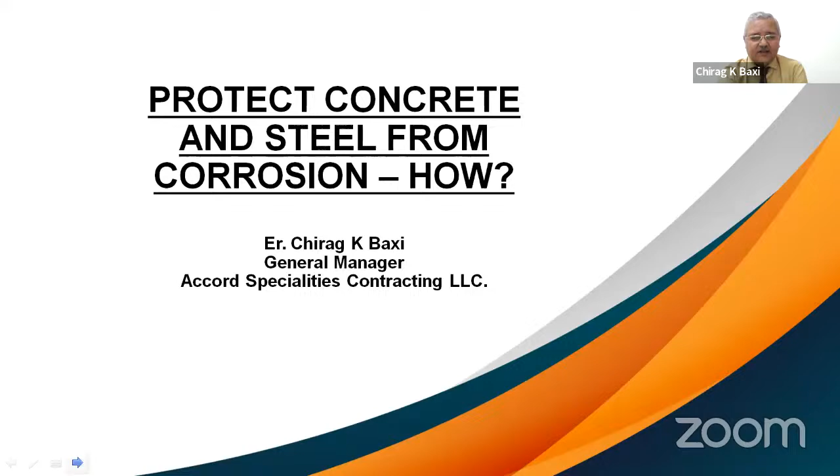Concrete has been helping the construction industry for more than two centuries, and we have reached a stage where we are making concrete sustainable. We want concrete to be sustainable, and for that, we want measures to make it sustainable. How do we do that? According to me, there are fundamental essentials which make concrete sustainable, as we'll see in the next slide.

Concrete is alkaline. When I lecture in university classrooms, I always ask students what the pH of concrete is, but that's not the right question for this platform. The alkalinity of concrete must be maintained right up to its full curing period, or even more—for the whole functional life of the concrete member. Alkalinity is the basic nature, the basic phenomenon of concrete, and that must be maintained. If it is disturbed, we are heading towards its end.

Second, all efforts should be deployed to bring the porosity to zero, or near zero. We all know it is impossible to manufacture impervious concrete. That's fine.

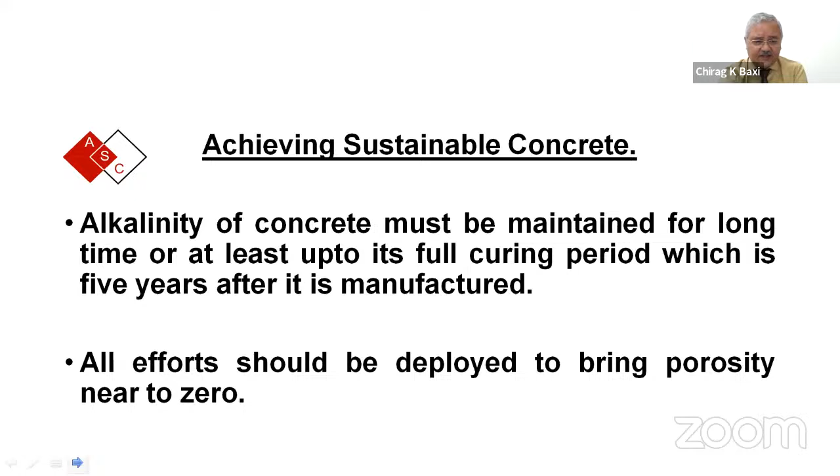But if porosity is brought close to zero, there are very few possibilities of contaminants entering the concrete mass and spoiling the concrete. So this is the second essential thing which should be done to make concrete sustainable.

Third is resistance to chloride. Chloride and sulfates are the strongest enemies, the contaminants that cause concrete to corrode. Resistance to chloride must be ensured right at the wet stage as well as the hardened stage. We should not leave any chloride-containing element even at the wet stage, so that it continues into the hardened stage and develops damage there.

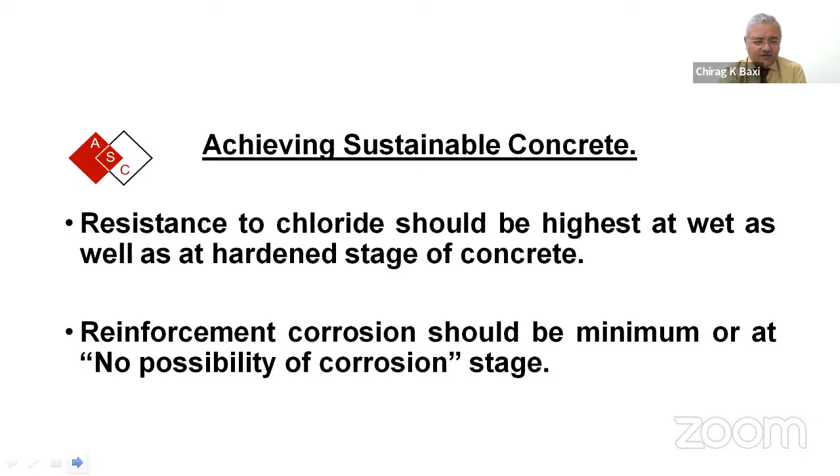Concrete has got some limitations. Concrete is ultimately a man-made material, and it has limitations - alkalinity and so many other things - and we design for that. But concrete has limitations, and we must be able to identify those limitations and ensure concrete is not exposed to those challenging conditions, so that it doesn't start deteriorating and getting corroded.

Factors which affect sustainability are being discussed now. Concrete corrosion - what is concrete corrosion? We are much aware of steel corrosion, rust products, orange products, Fe2O3, Fe3O4, FeO, and all those things. But what is concrete corrosion?

Concrete corrosion, as per my definition and applied knowledge, is a phenomena under which the ingredients of concrete are depolarized, leading to heterogeneity. There are quite many factors which depolarize concrete. The homogeneity of concrete goes away. That can happen only when cementitious binding actions start getting away. So that is concrete corrosion, according to me. By grace of God, it has been agreed upon by so many platforms and areas - this is what I would like to define as concrete corrosion.

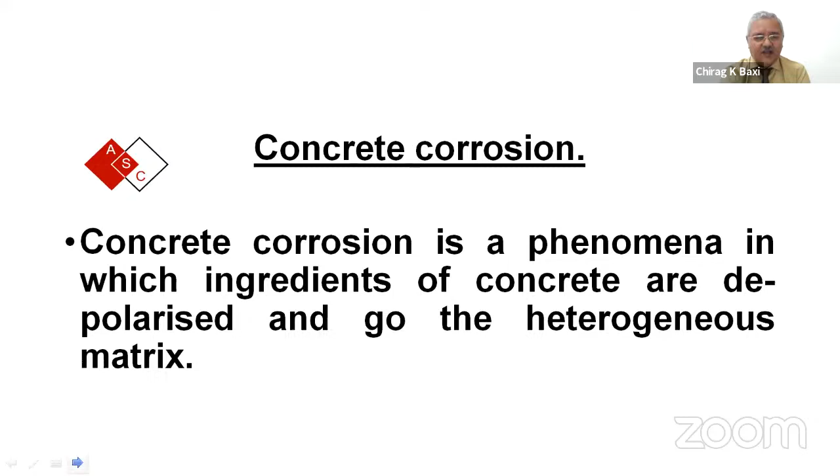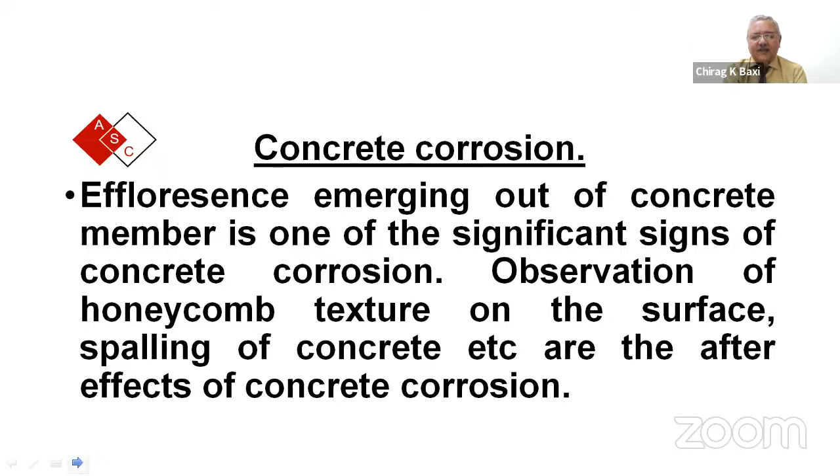Efflorescence emerging out of a concrete member is one of the significant signs of concrete corrosion. Observations like honeycomb texture and spalling of concrete are the effects of concrete corrosion. So concrete corrosion can be seen when we see efflorescence coming out, some honeycomb signs, and spalling. Spalling is a later stage, but when we see these types of things, we have to be alert and on our toes to see that it doesn't propagate further.

Conditions which cause concrete corrosion are now being discussed. High humidity - when concrete is exposed to very high humidity, it cannot function well, it cannot breathe well, it cannot have equilibrium between inner and external humidity, and then concrete starts corroding. High temperature also is a factor which corrodes concrete. We will see the effect of high temperature in one of the slides later in the presentation - what high temperature can do to the concrete structure and matrix is also one of the important factors.

Saline conditions - as we all know, in UAE and in GCC by and large we have saline conditions. So salinity, salty conditions, cause corrosion. They start penetrating inside the concrete core. They have hygroscopicity as a nature, and that helps them enter the concrete mass. That starts reinforcement corrosion - if by any chance we have left any contaminant close to the reinforcement steel, it will start corroding. That also will be the beginning of concrete corrosion.

Since we are all structural engineers. Sometimes design inadequacy - I have seen in this part of the world that design inadequacy emerges from some deficiency, some sign, some effect, some crack from a corner, which ultimately, when analyzed, traces down to design deficiency. It may not be failure, but it is concrete corrosion - the beginning of concrete corrosion. Design deficiency also can lead to that.

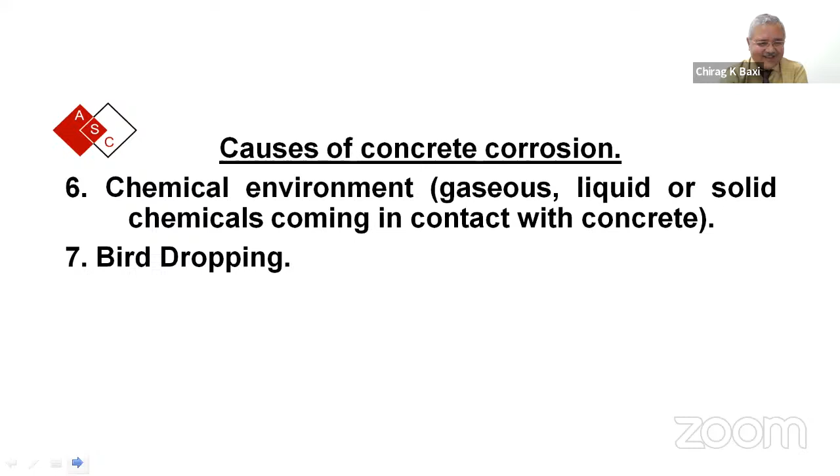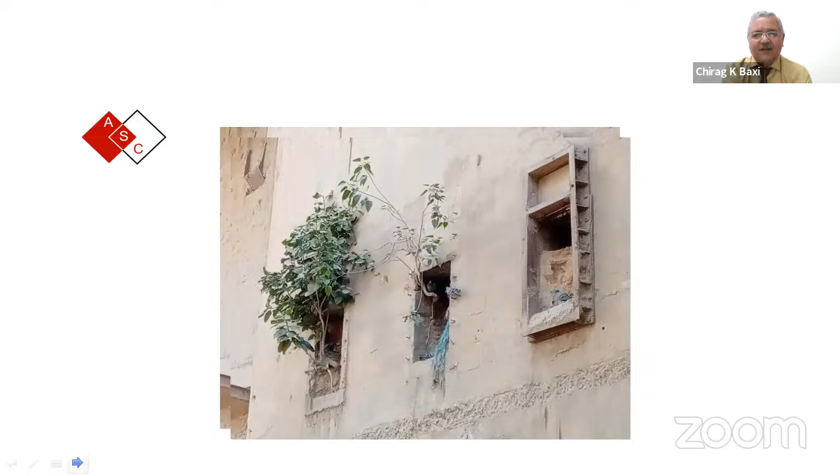The undigested stuff in bird droppings leads to plants growing, like in a terrace garden or window jambs. This plant has come up only because of bird droppings, and these plants have deep roots. When deep-rooted things start penetrating inside the concrete core, they start eating away the concrete matrix, and that's how cracks develop. That again is the beginning of the end.

Substandard construction practices - I don't want to talk much about that. There are many practices which have to be maintained as per standards laid down all over the world. But sometimes substandard practices come out during NDT analysis. When we analyze the structure and correlate the NDT results, sometimes it comes out that there was no reason for a concrete member to fail or get corroded, but substandard practices emerge at that level. I have seen that in my analysis.

There are forced compromises because of financial controls. My budget was $2,000, and I was asked to do it in $1,500 or $1,850. So where do I cut down my $150? I do not know - inadvertently, unknowingly, I would compromise somewhere on quality, and that may bring it down to the concrete corrosion stage.

Lack of maintenance - concrete structures must be maintained whenever they're exposed to saline conditions, UV attack, humidity, or wherever. They must be regularly inspected and maintained, so that a stitch in time saves nine. It's a proverb in English - a stitch in time saves nine. So if you take corrective action at the right time, you don't have to enter into a big chaos.

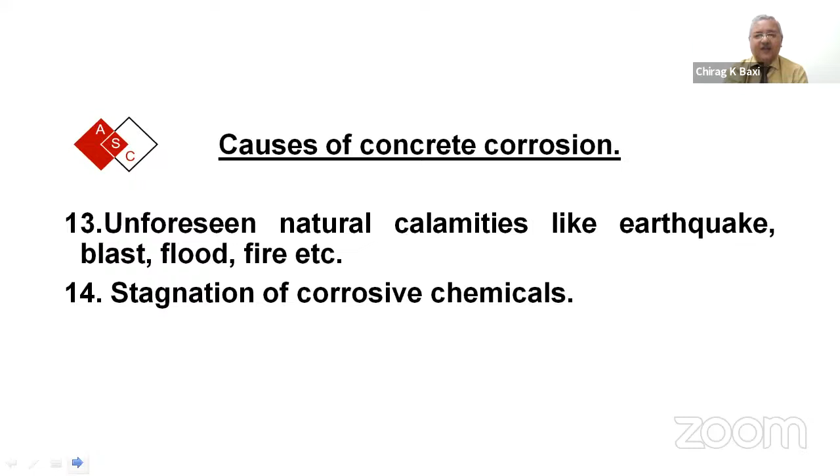Why do we have woolen wear in winter? Why do we have raincoats in monsoon? That is to protect our body. And concrete, as I said in the beginning, must essentially be considered as a lively element - it is not a dead element. So concrete also needs protection from all these conditions.

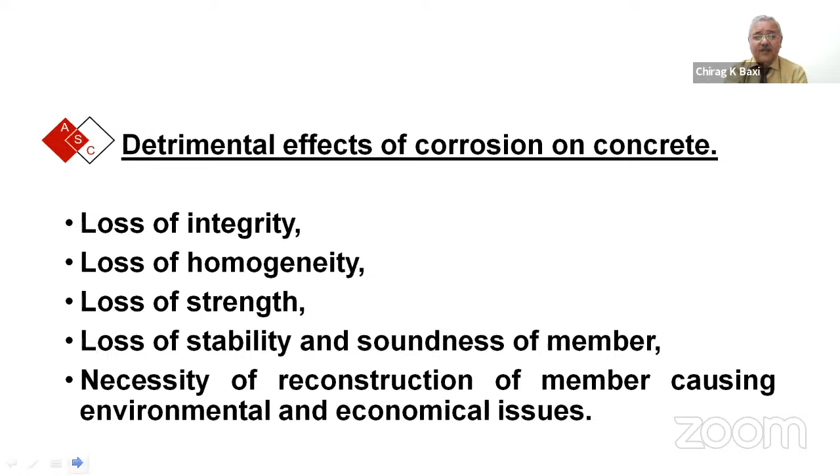What happens with concrete corrosion? Loss of integrity - homogeneity is lost, strength is lost, stability and soundness of the member gets affected. The member goes into an unsafe zone for the load-sharing phenomena it was designed for - maybe a column, beam, slab, foundation, or any structure - and it starts losing its stability. This necessitates reconstruction of the member, causing environmental and economical issues - ultimately it costs money. So we have to minimize reinforcement corrosion.

Measures to mitigate concrete corrosion - how can we mitigate it? Before I go further, I must tell you that the four factors I mentioned earlier give internal immunity to the concrete member. As we have internal immunity for our body - we take vitamins and supportive medicine, immunity-boosting doses - so that we have internal strength to resist and fight against any adverse condition. Those four conditions impart internal immunity to concrete structures, and that must be there.

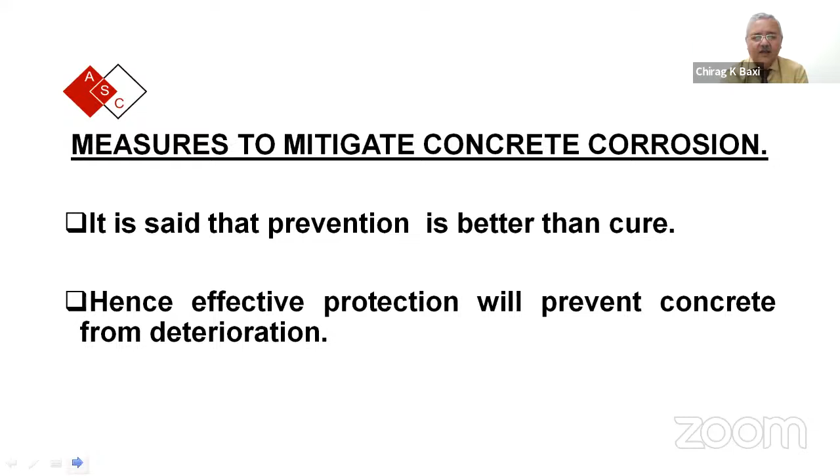In addition, the external factors which can protect concrete are being discussed now. It is said prevention is better than cure - definitely prevention has to be done, and that is discussed in those four points. However, effective protection can definitely prevent deterioration. Mitigating concrete corrosion can be based on effectively protecting concrete.

Then, carrying on to corrosion, the treatments which have been standardized are being discussed now.

In this, the industries have a different scenario. The industrial scenario is totally different from what I'm going to talk about now, because it needs acid-proofing treatment, tiles, bricks, stones, epoxies, vinyl esters, polyesters, and sheets. But these are not being discussed now since we are not into the industrial area. So we'll talk about the conventional things to be taken care of.

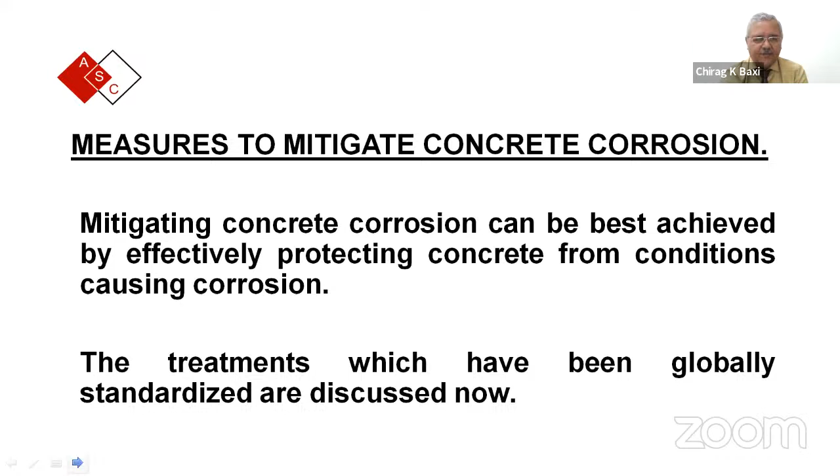These are the criteria for selecting material for protecting concrete. It should have inertness, zero reactivity to the material or conditions causing corrosion.

Thermal coefficient of expansion and contraction is very important. If we apply a treatment that doesn't have a similar or close thermal coefficient of expansion and contraction to the concrete surface, both will behave differently, and we don't know how that bond will be carried unless the elastomeric quality is very prompt.

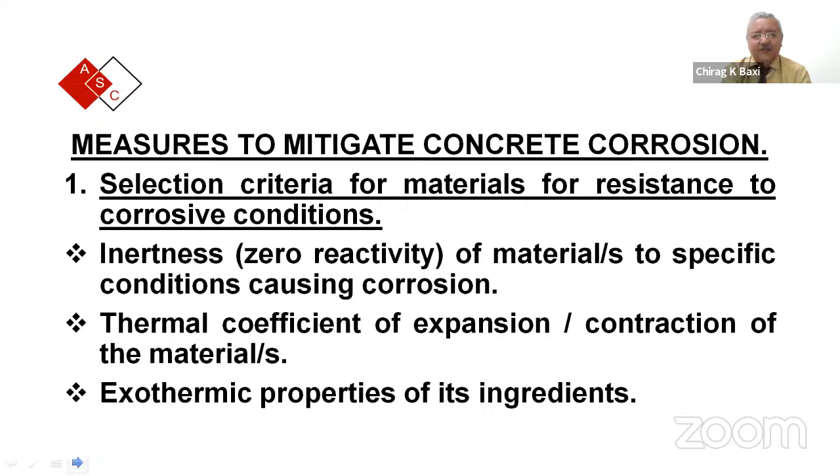Exothermic properties, especially with resinous materials like epoxy-based material, matter a lot in selecting this type of coating. Compatibility of material is important too, as there may be a combination of conditions.

Sometimes there may be salinity as well as UV attack. In this part of the world, structures standing in front of the sea face UV attack of sunlight along with salinity. When combined attacks are there, the compatibility of the coating material should be such that it resists both conditions effectively.

Economics, of course, everything ultimately ends up on economy. So economical aspects must be taken care of.

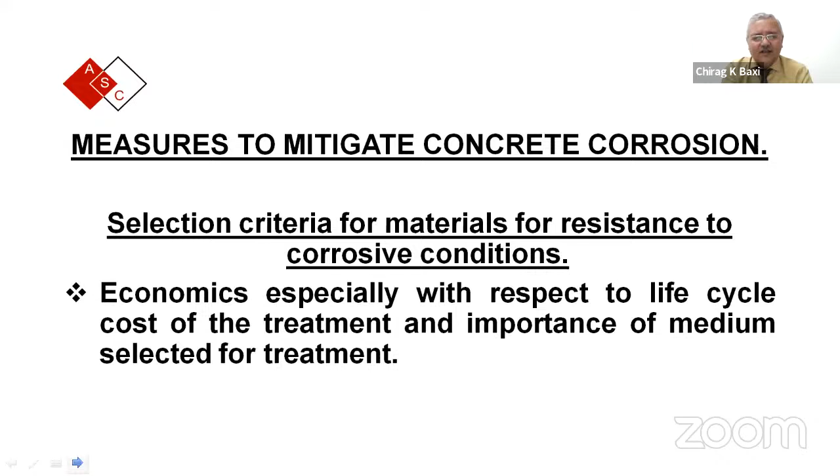Here I have added one point: functional life. What exact functional life do we expect from that coating, or from that member? If it is more, the treatment can be commensurate with that life expectancy, rather than gold-plating things when we only want the structure to live for 2 years. That may not be required, right?

The nature of damage caused by the corrosive condition must also be seen—what UV attack will do, what salinity will do, what thermal effects will do, what humidity will do. All these things must be taken care of, and that is how the treatment must be decided.

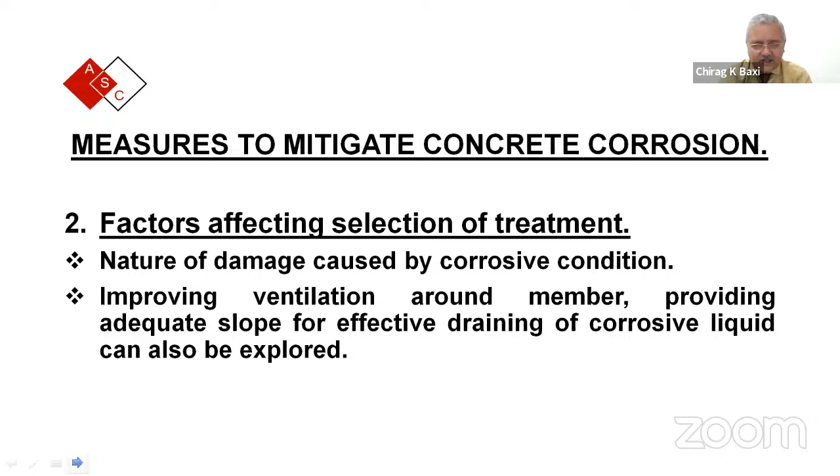It should be a tailor-made system. Improving ventilation and effective draining are parameters which can support mitigating corrosion, in addition to internal and external treatment. Protective coating to effectively resist the conditions causing corrosion is a basic fundamental requirement for prevention.

Protective coatings are usually not cosmetic coatings. Cosmetic coatings have different functionality—they focus on gloss retention, beauty retention, and such things. Protective coatings may not have that cosmetic value, and should not have. I mean, they may not have it. Protective coatings are different from cosmetic ones, as I said earlier.

Polymeric coatings are protective coatings. Resinous coatings are protective coatings. Modified acrylic coatings are protective coatings. Anti-carbonation coatings are protective coatings. So there are a few types.

These are four types, though there may be many more. There may be integrated protective coatings which have to be designed as per the prevailing condition, or the condition to which the member is exposed. That is most important—it should be tailor-made. Copy-paste doesn't work here, so it should be tailor-made.

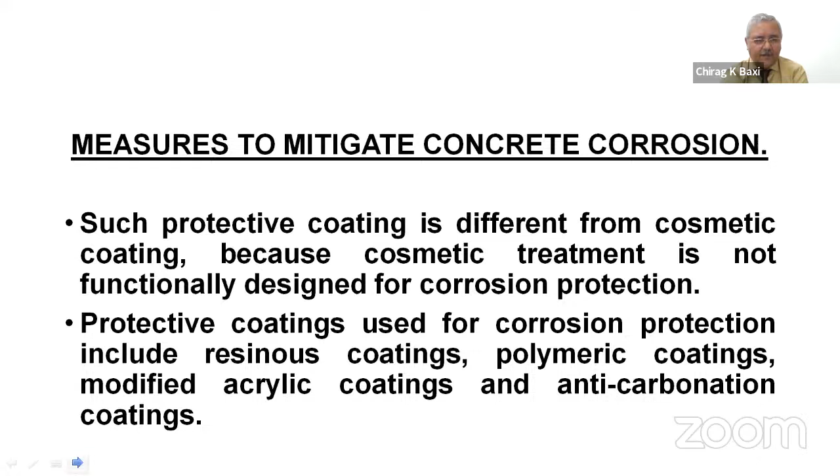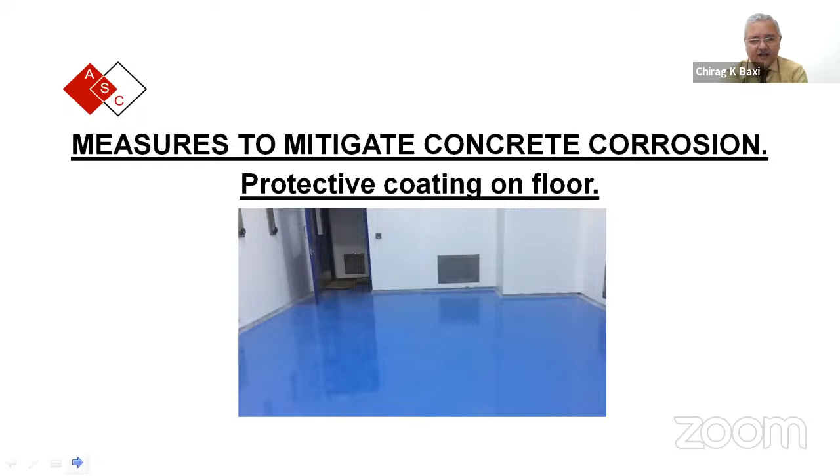Even after all these things, suppose concrete starts getting corroded or deteriorated, something has to be done. Then we have to become a pathologist first, and then a doctor. As a pathologist, non-destructive testing of the concrete is done first to see the extent of damage, the root cause of damage, the severity of damage, and combining all these things for analysis.

Preferably with a forensic engineering approach, this can lead us to the right scheme suitable for retrofitting that particular deteriorated member, to bring the functional life back to the desired level.

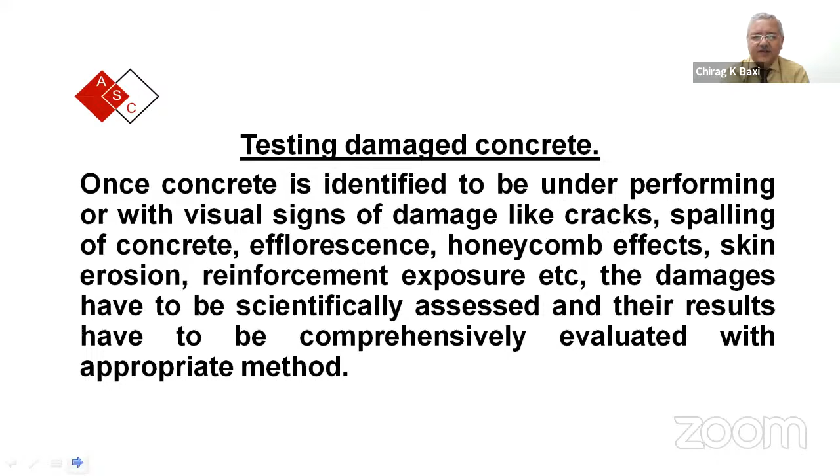In spite of this, as I said earlier, actions begin with testing. Once identified, these are the signs: cracks, efflorescence, honeycombing, erosion, skin erosion, reinforcement exposure, etc. These are the signs which lead us to believe concrete is starting to deteriorate.

This is the sequence followed to bring concrete back to normal condition: damage assessment, analyzing the NDT results, designing the tailor-made scheme—which is very important—execution of the scheme for rehab, and then repeat NDTs. The NDTs revealed that the structure was deteriorated and quantified the damage potential, so repeat NDTs ensure the structure has been retrofitted well.

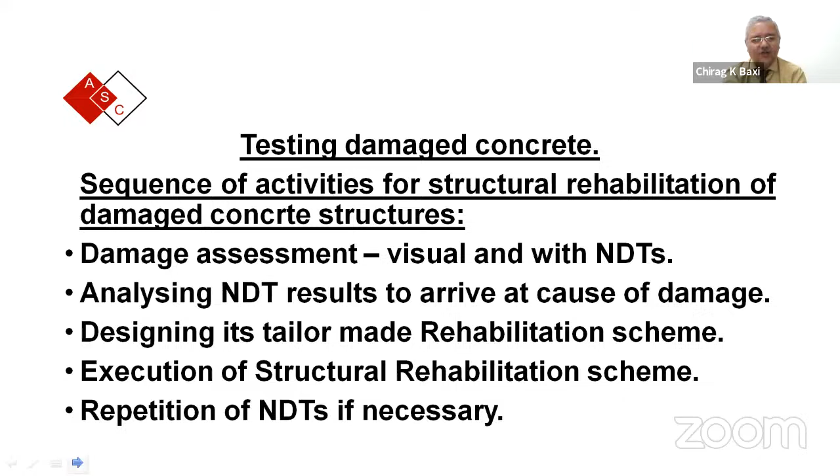The doctor put a thermometer in my mouth to check—I had a fever of 104°F. After I was cured, he again put that thermometer to see that my temperature was normal. That is what should be done, and it should be repeated.

Damaged concrete must be tested with non-destructive methods. Why non-destructive? Because the concrete is already damaged—why do we want to cause further destruction, core extraction, or more damage? Go for NDT methods instead. There are many NDT methods available in the world now which can take you close to the root cause of the damage.

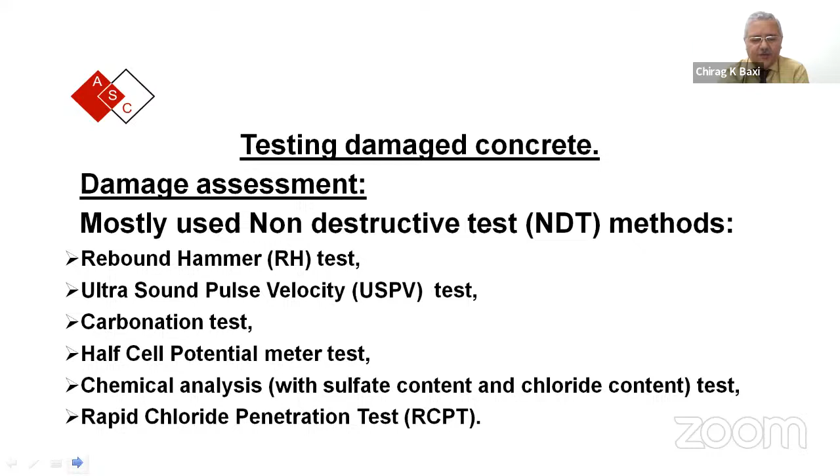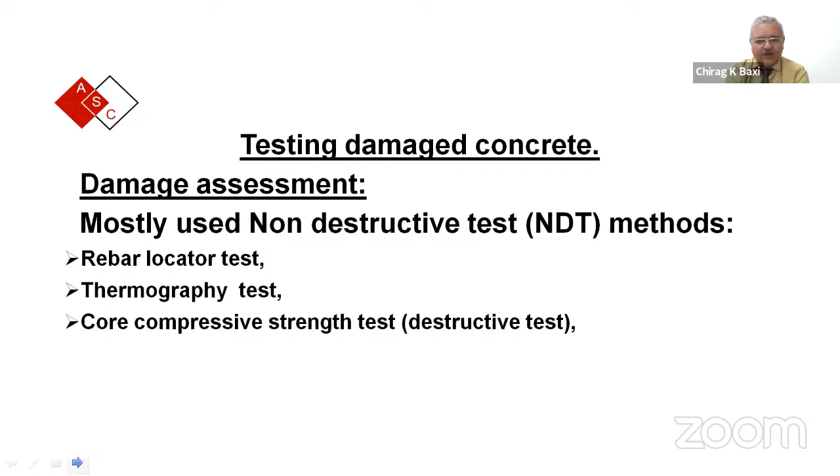These are the mostly used NDT methods, though there are many more: rebound hammer, ultrasonic pulse velocity, carbonation test, half-cell potential test, chemical analysis, sulfate and chloride content tests. RCPT is one test not regularly done, but it's used to find chloride penetration potential in hardened concrete. There's also the rebar locator test and thermography test. Thermography used to be done only on steel structures, but now it's also applied to concrete structures—I have written a draft IS code, Indian Standard Code, for this test in India. Core compressive test is a destructive test which I don't advocate much.

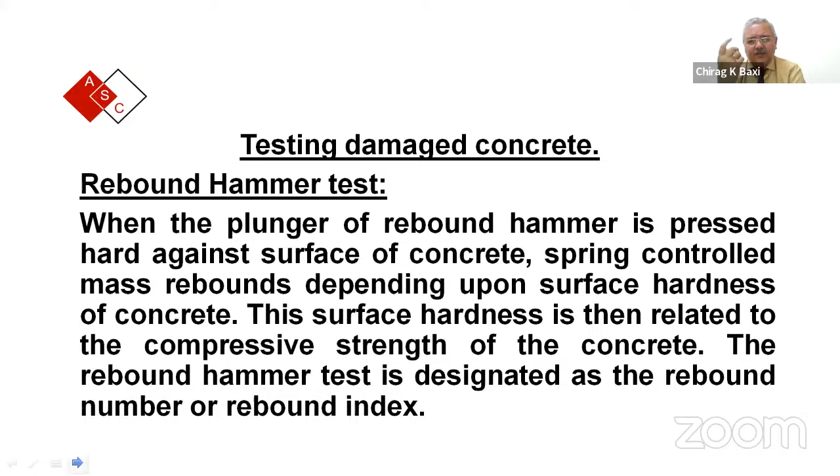We'll run through the rebound hammer test quickly. This is a rebound hammer—it's very easy. It measures surface hardness through the resistance offered by the spring, giving a rebound index, and it can be done through calibration.

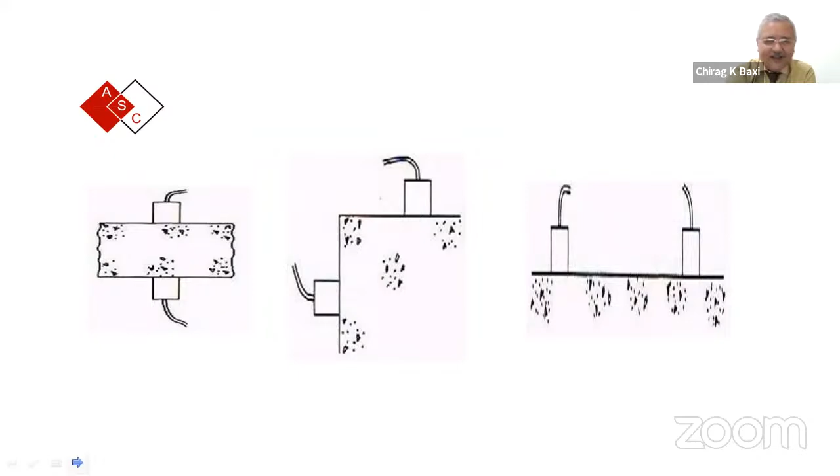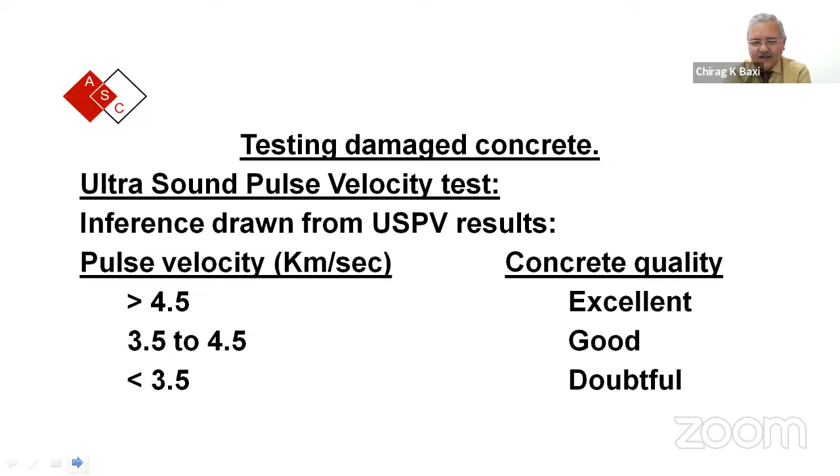These are the velocity values as per the Indian Standard, correlating velocity with the condition of concrete. Carbonation is a test for carbonation effects, which we all know about. A phenolphthalein spot is applied—when the color doesn't change, the concrete is carbonated; when it changes, it is not carbonated.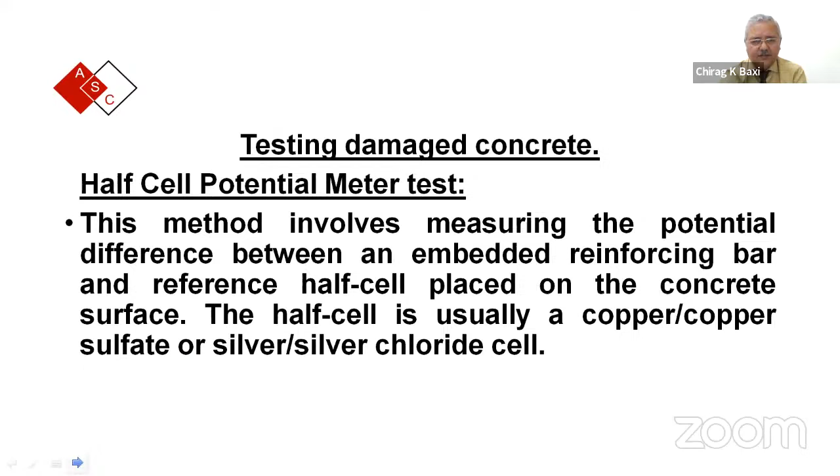The half-cell potential test measures the potential difference between one end of the reinforcement bar and a voltmeter, to identify the additional resistance offered by the corrosion product, which brings you close to identifying the reinforcement corrosion area. That's the philosophy behind how it works. ASTM C876 also gives a standard test method for this.

Chemical analysis: as I said, chloride and sulfates are the most dangerous contaminants for concrete, so they must be tested. In chemical analysis, pH is tested, then sulfate content test is done, and chloride content test is also done in a similar manner.

Now, conditions causing steel structure corrosion—I also have to cover steel structures. Steel structures also get corroded; under which conditions this happens is more relevant to industrial areas, but we must know this, so I'm bringing it to your notice: corrosive fumes or splash.

Unprecedented stresses generated within structure. This is very important - unprecedented stresses lead to stress corrosion, and stress corrosion takes place significantly under high humidity or high temperature. Modification of functionality also matters. The structure was designed to support a mall sort of culture, and one day you start producing soda ash in that space. What will happen? It will start corroding. So when you change functionality, that also will corrode things.

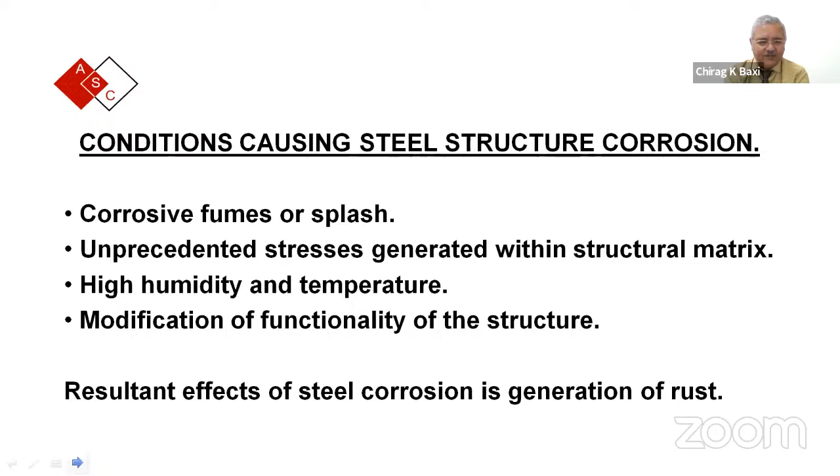Resultant effects of steel are seen in generation of rust. Steel structures get damaged due to exposure to corrosive conditions. The first parameter affected, I think, is section thickness being reduced. Usually, in my experience over the last 4 decades, to reduce 1 millimeter of thickness of a steel member, it takes about 1 year in normal corrosive condition, and only 8 months in severe conditions. That is important. No book or code will say that, but my experience says that. That's what I shared with you.

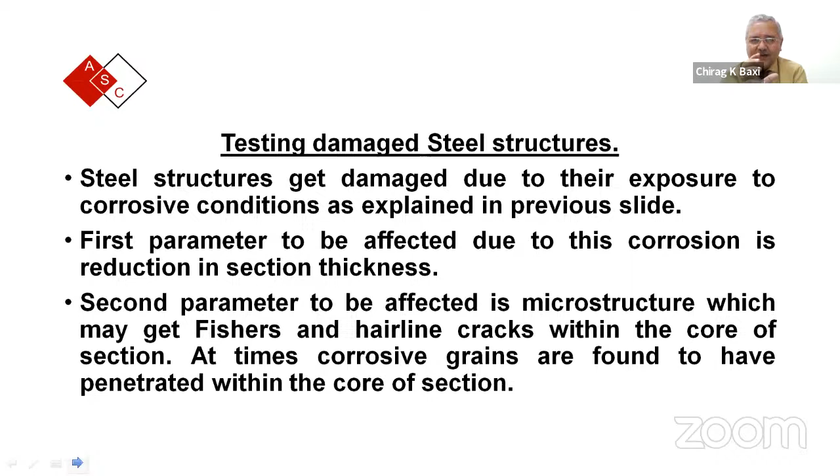Second parameter to be affected is microstructure. Here I'll show you some very beautiful thing - how microstructure gets affected with corrosion. Tests to be done are section thickness, microstructure, thermography, and metallurgical analyses. All those analyses are to be done for steel structure.

Thickness of metal structure, of course, is done by thickness measurement - it is just like USPV measurement. This is what I want to share with you with some discussion.

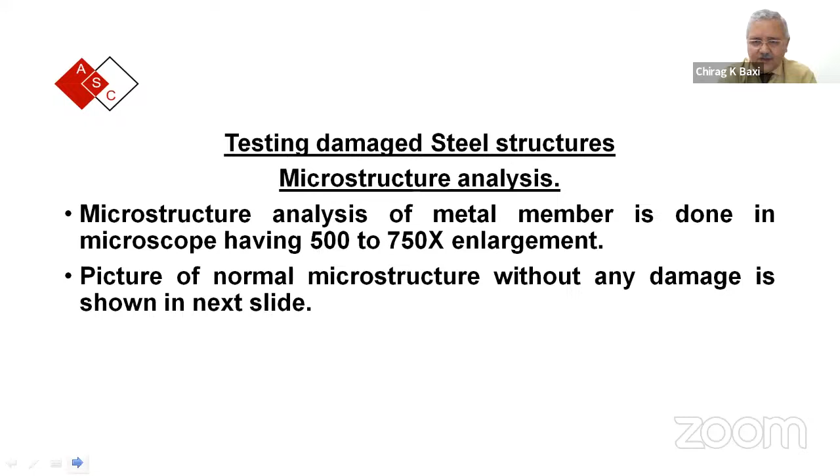Coming back to concrete, when concrete has deteriorated, NDT has been done. Now we have to cure the concrete. So now pathology's role is over, and now the role of doctor starts. We have to assume the role of doctor. Damage assessment was done - now this is where I want to spend some time with you.

Results of NDT have to be comprehensively analyzed. This is very, very important. You cannot rely on one result of NDT - not on rebound hammer alone, not only on USPV, not only on half-cell potential test, not only on RCPT tests or thermography tests. All results have to be seen simultaneously and comprehensively, because every result, every parameter represents a different aspect, and every parameter has influence on each other parameter. All parameters are interlinked with each other.

If porosity is identified under USPV, and reinforcement corrosion is also identified, I do not know whether strength was bad or not. If strength was good and reinforcement corrosion was there, then was USPV bad or what? So we have to identify whether the concrete mass is bad, whether reinforcement is bad, whether some practices were bad, whether some contamination is still present in the concrete, or still something settled within the concrete. We have to identify this. So it is very, very important, it is mandatory - it is a holistic requirement that all NDT results have to be very comprehensively evaluated, preferably with a forensic engineering approach. It's very important.

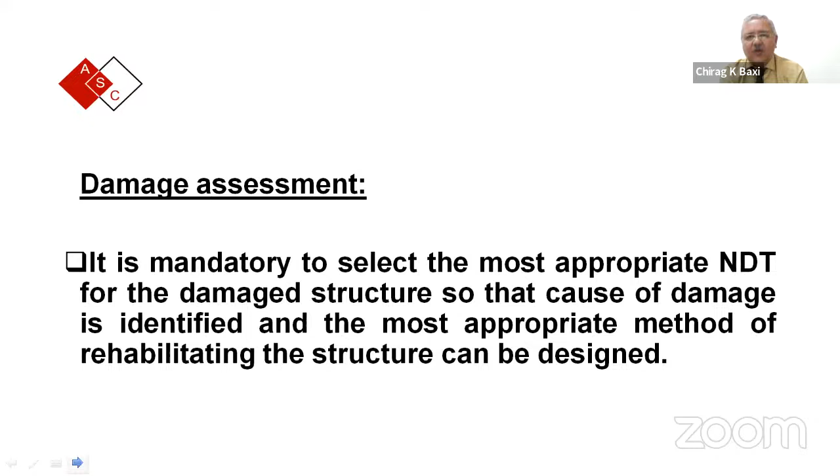That's what I've been telling, with specific bearing on this - every NDT result, comprehensively analyzed, will lead us to the right rehabilitation scheme. If porosity was more, then we have to think more, focus more about grouting - injection grouting - because the core has to be strengthened. If reinforcement was bad, if carbonation was there, if chloride was there.

Have you heard of flushing of a concrete member? If the contaminants have gone and settled inside the concrete mass, it has to be flushed, and the contaminants have to be taken out. I recently completed, maybe in October, a project wherein I flushed the concrete section, and the mass which came out of the other side of the nozzle, when tested in the laboratory, shocked people - the chemical being manufactured in the industry was found to be part of that extraction. So flushing is important.

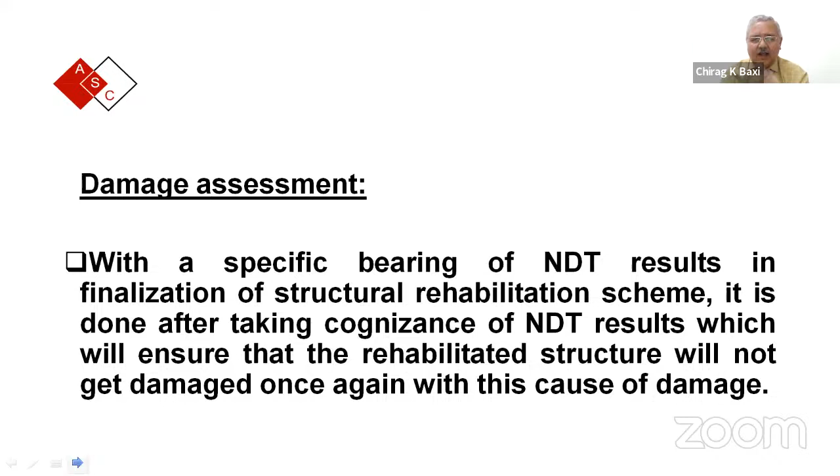So every NDT has a bearing on ultimately designing the rehabilitation scheme.

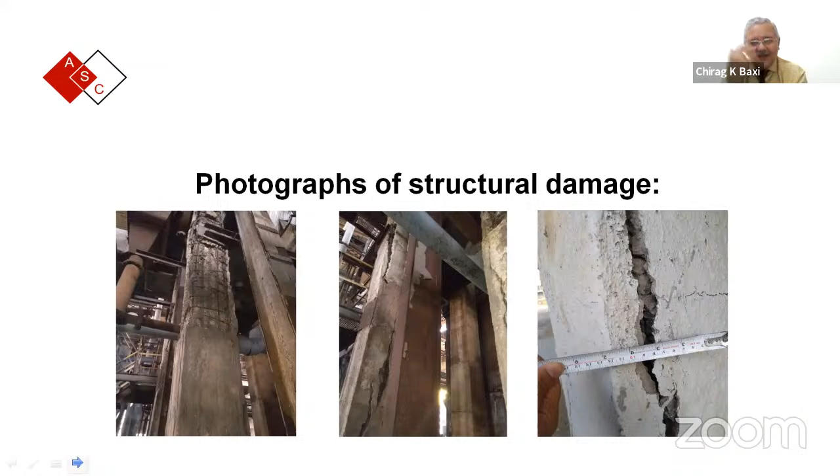Don't be shocked to see these structures. These are pictures of real structures, not animated ones. The one on your left is one of the 8 columns supporting a boiler on top, which has a static load of 40 tons. You can see the condition of the concrete, yet it was surviving and the boiler was running when I visited this area. So I want to show to what extent concrete can get damaged and deteriorated, and still the great concrete stands still and functions.

I do not know where this cover concrete is tending to go, where it has decided to go. I do not know that.

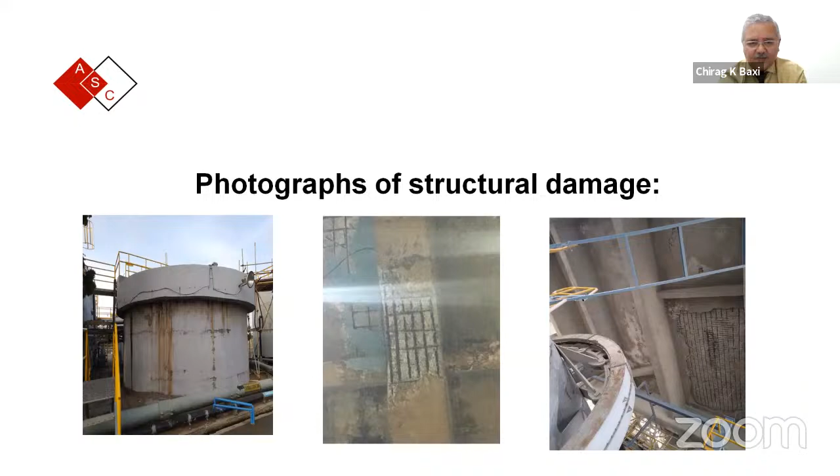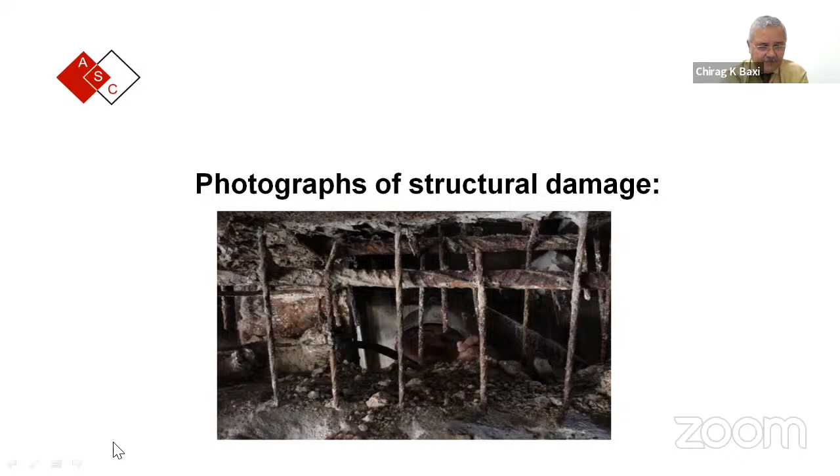Let's see. There are some criteria for structural rehab scheme design. The fresh mass must be supported and should have identical properties as the mother mass, so that the thermal behavior and density go at par with each other.

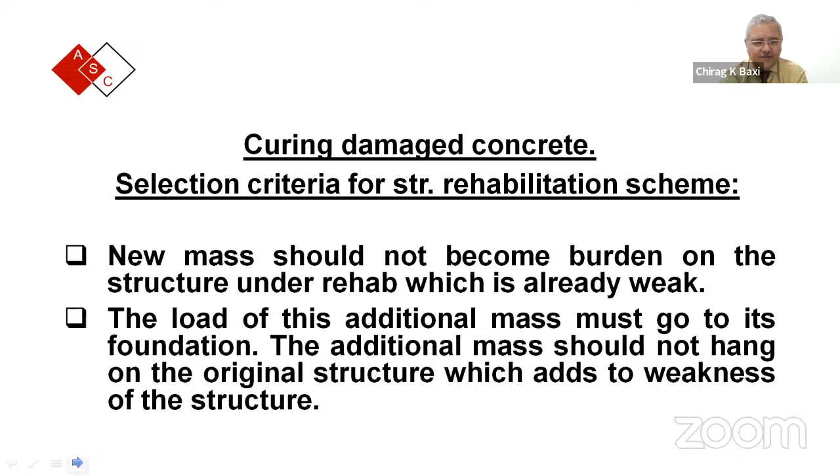The new mass should not become a burden. It should be supported right from the foundation. High density material is fine, but it should not become stressful on the mother mass - that is very important. High pressure applications are good, as in high injection grouting, but it should be moderate and balanced, such that the material goes inside up to the crevices but without excessive pressure that would increase the crevices. So that should be a very meticulously calculated area.

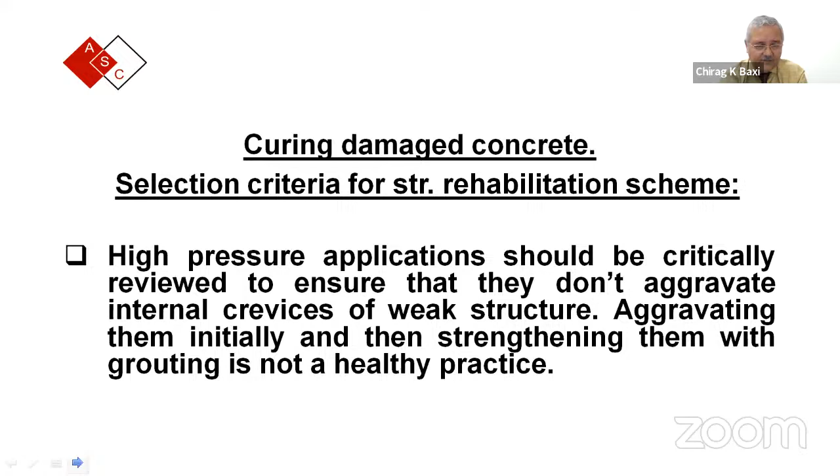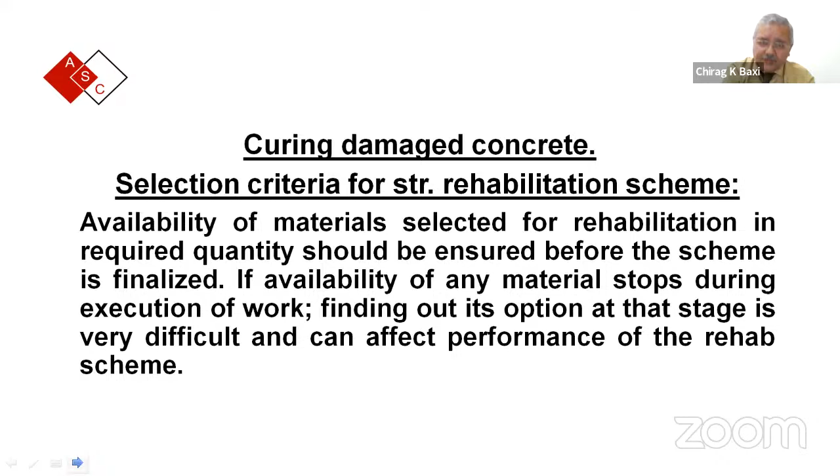Then the physical properties of materials, chemical compatibility, exothermic reaction, pot life of the material, and consumption pattern should be decided before we select the material for rehabilitation. Availability of material should be ensured - we design a scheme consuming maybe 1,000 bags of material, but then one fine day we find 400 bags are left, and they will take some time to come, so the time factor will play its own part in further delaying the rehab scheme.

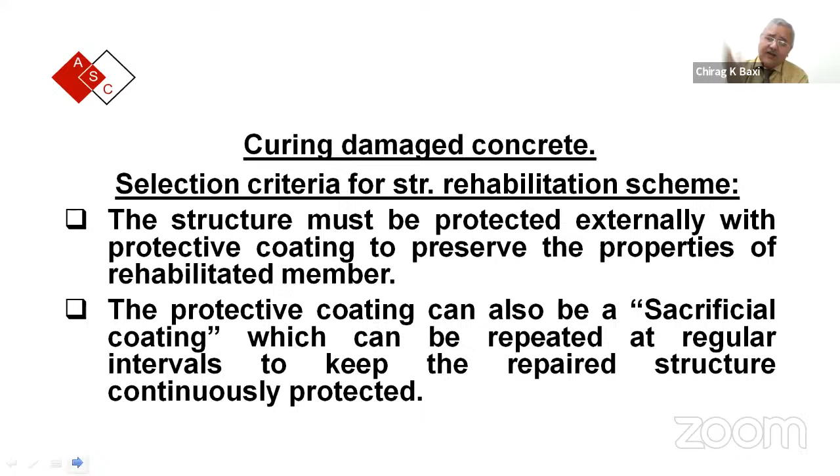The rehabilitated surface must be protected. Though we have done the operation of rehabilitation, it must be protected - it can be a sacrificial coating, but it must be protected, as we saw earlier. Finally, the selected material should cause no accident. Environmentally it should be good - no environmental hazard should be there. Some materials create harmful conditions, so they must be very carefully handled.

Now this is very important. Rehabilitation is a very important activity wherein we have to see that if we are rehabilitating only one or two members, other structural members are not affected. That is very important, because we recently came across this right in Dubai - we were trying to rehabilitate three members, but its resulting effect was coming on the fifth member, and the fifth member was failing in the structural design. So that had to be addressed first before taking these three members for rehab.

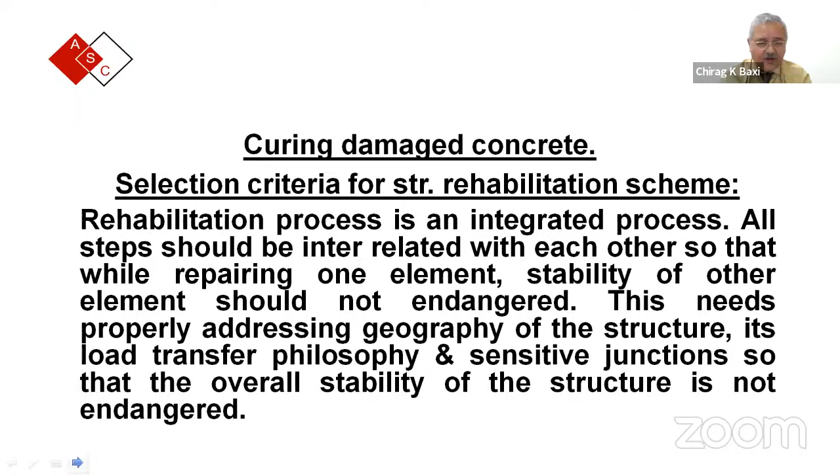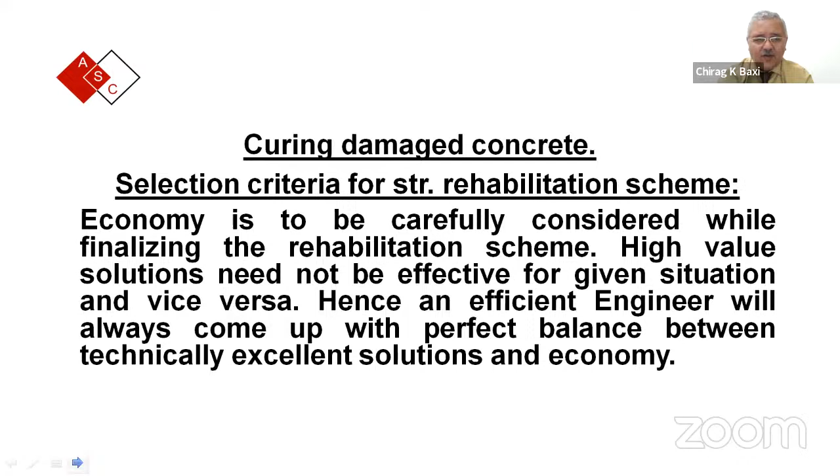The demolition should not generate any environmental imbalance - that is very important. Economy ultimately comes down to economy, it cannot be ignored. So for case studies, as I told you, I am from an industrial background. I'll go with a case study of a steel structure.

Let us start first with the steel structure. These are steel structures exposed in industry. All the white you see is deposit of corrosive chemicals, and this is the steel member. I do not know whether it was ISMB 250 or MC 150, but you can see how many layers of corrosion have taken place. I just wanted to show that.

How do you expect this member to carry all these loads against dynamic load, static load and wind pressure? I'm just bringing to your notice that these things can happen in industry. Fortunately these things do not happen in conventional domestic areas, but they happen in industry.

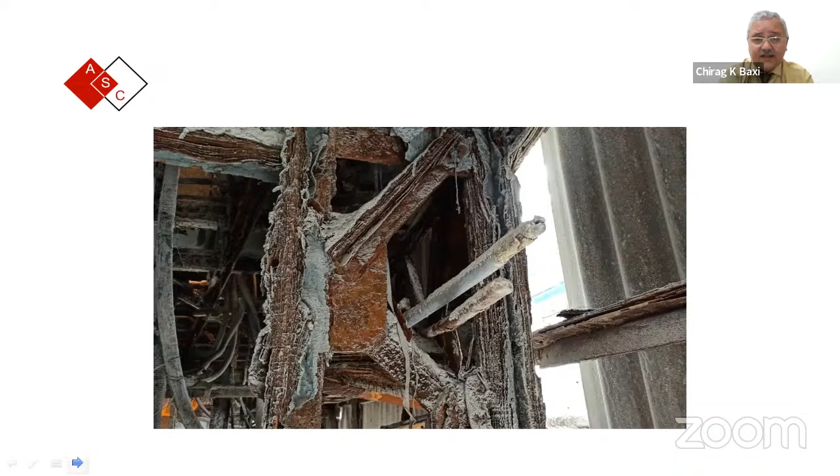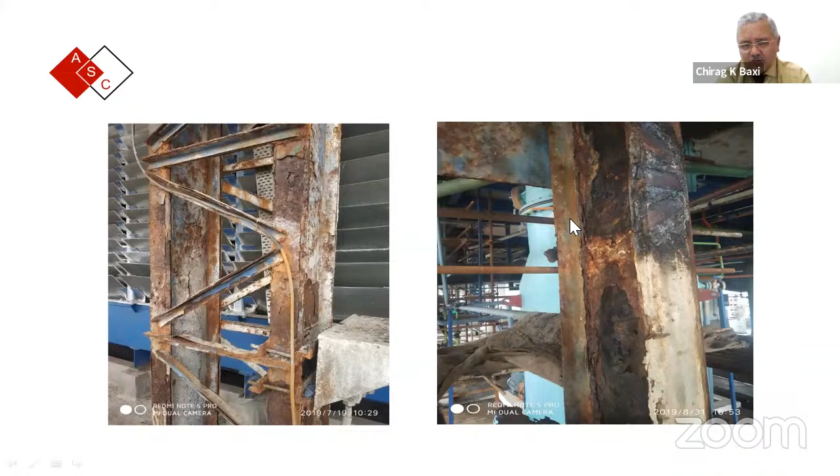This structure has lost its stability. We checked the stability and it had gone, so we had to go for a different method to rehabilitate the structure and recoup the load carrying capacity. Where do you see the structure going? I do not know whether this will take any more load.

Again, same members. You can see to what extent the skin has started eroding. Same thing.

Now this is the structure, under rehabilitation. This is a structure which I handled, so I'm sharing with you. We identified the issues. We didn't want to bring down the structure and erect a new one, so we identified what were the lost parameters.

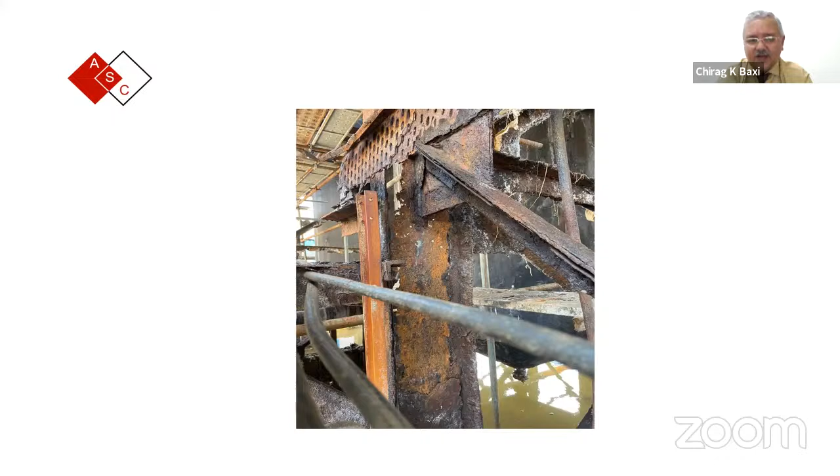Re-engineering was done, reverse engineering was done. The members which had reduced thickness or reduced parameters, where the structure was designed with those lesser parameters, what was required to be recouped was identified, and those spots were identified. You can see some plate has been placed here, some plate here, one member placed here. We augmented those members to make up the lost parameters, and that is where the structure was rehabilitated. This is called steel structure rehabilitation.

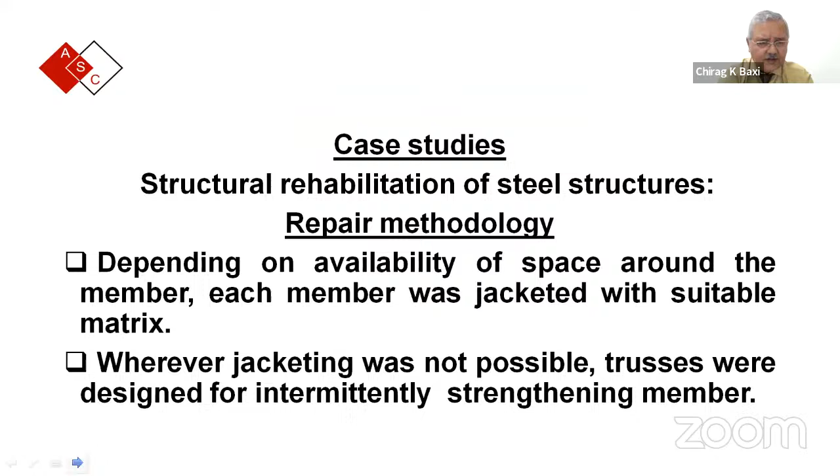What we did, what I said, the same thing has been told here. And now we go to concrete structure.

Put your hands on your heart so that you should not feel bad. One structure got severely damaged under a severe explosion. A 10 metric ton ammonium nitrate tanker got blasted in an industry somewhere around 2003. That is where one lime storage structure was very badly affected. I'm showing the case study of that structure. The structure was severely damaged.

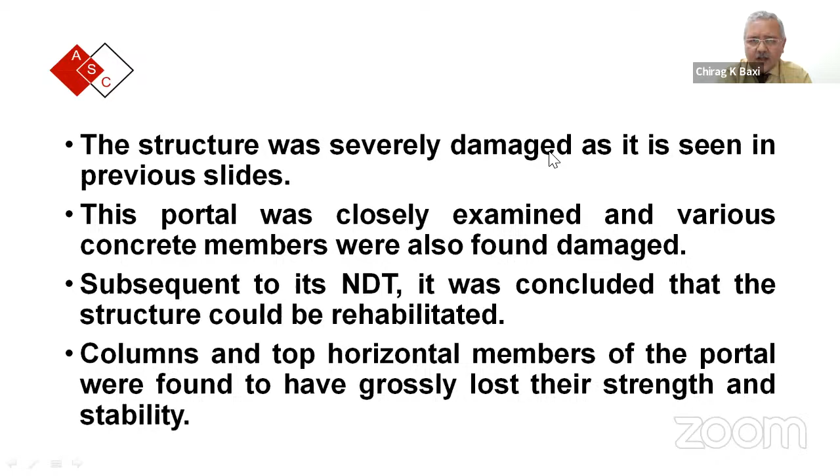Okay. I'm sorry, I'm not able to show the photographs, probably the slideshow is not working. Ma'am, can you show these photographs? Can you run this slideshow? Go to presentation mode, maybe Chirag, because maybe that's why we can't see them. They show on the original one. Okay, you want to stop sharing and share again the PowerPoint? I'll stop sharing here and start sharing again from here. Okay, share the PowerPoint, give me one minute.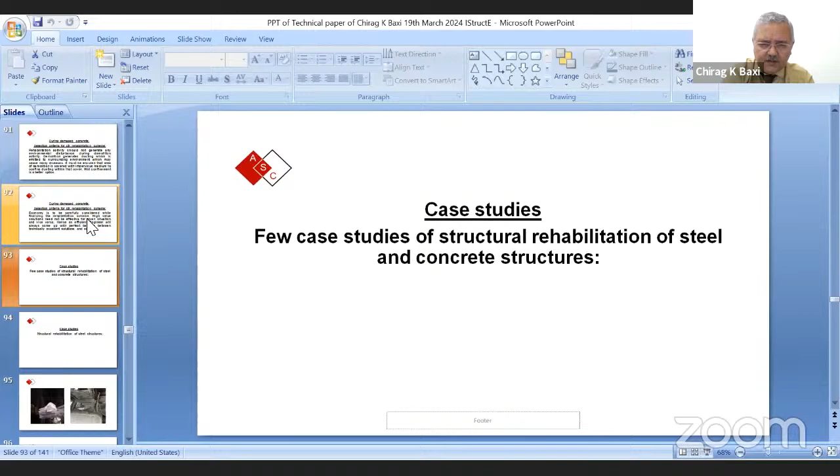Yeah, okay perfect, now you can go to slide 100. Yeah, of course. I'm doing it very quickly so that... Perfect, yeah. The slides are...

Yeah, this was the silo, the lime storage structure which was very badly damaged during the explosion. The members were bad, and the top member had totally gone. So what we did, the whole silo was a portal structure. The portal structure was then converted to a simply supported structure, and we erected steel trusses to make it simply supported. In the process, the structure became...

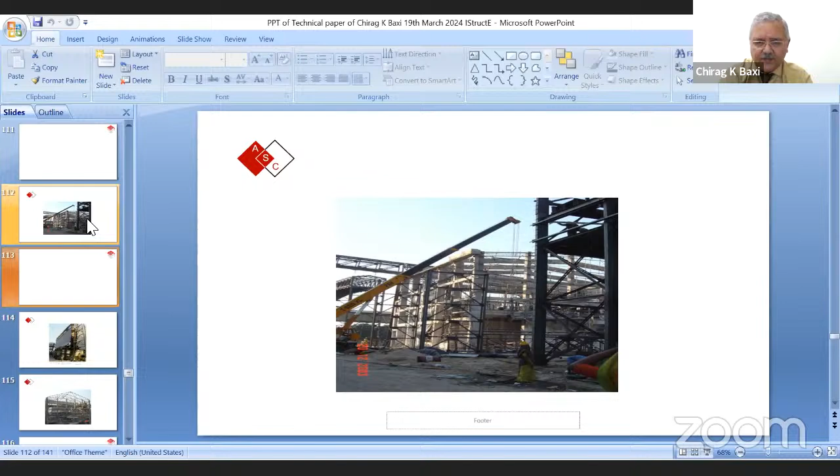The slenderness ratio increased, so the long columns effect was there. That was compensated by creating one more grid of columns. This is the one more grid of columns, and this is the trusses erected. I'm sorry I could not show the complete thing, but I'll share that with Imam with you so that you can share with whosoever wants it.

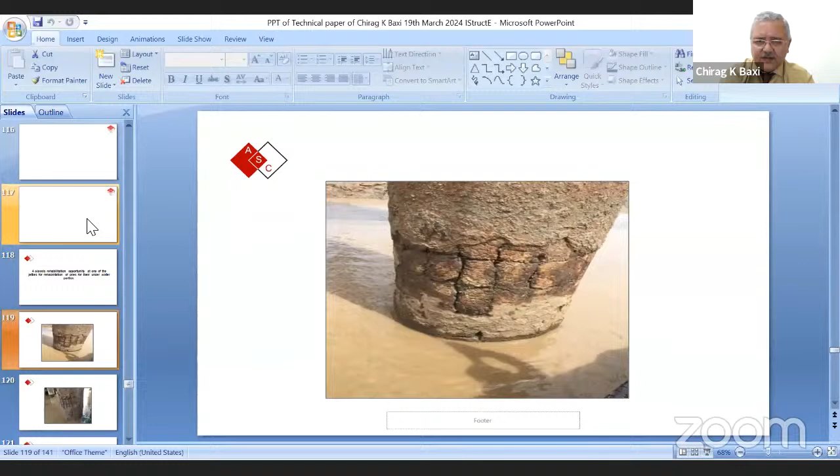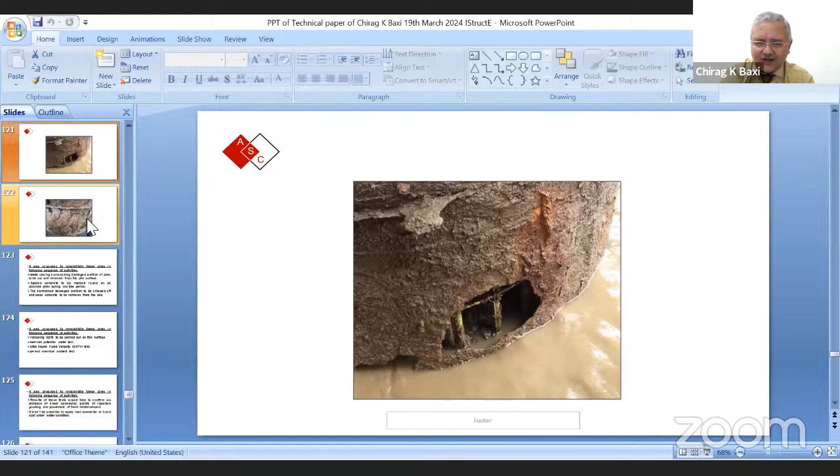Now the second classic example is piles. You can see these piles. Can you see how badly it has been damaged? It's very badly damaged. It is in a tidal zone area, wherein that high tide, low tide in-between area, slushy area. You can see the extent of damage the pile has suffered. Just see the hole on the pile. You can see what it must have undergone. Just see the condition, so here it's a classic example.

What we did, the rehab scheme was such that we designed shuttering, but the shuttering was to be left permanently over there. It was a two-half shuttering, two-half material of FRP. The FRP was designed with polyester as a makeup layer and vinyl ester as a top coat. Then micro concrete was pumped from the bottom, as we do in piles, and filled up to the top, and the shuttering was left there so that the external effect of salinity did not affect the piles. That was one of the classic things.

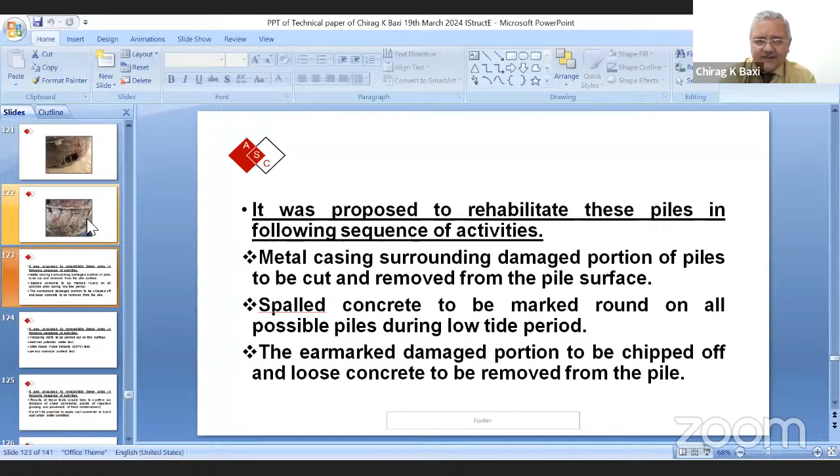And then we also managed such that reinforcement corrosion could be monitored from the top. So these are all the steps which we did. I'm sorry I could not show all the photographs. FRP was there, special care was taken to stop it, and okay.

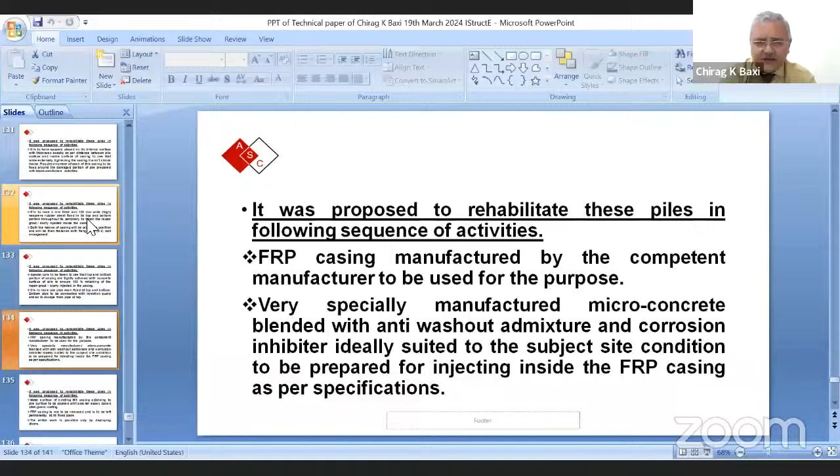General points to take care of. Inbuilt resistance to corrosion mitigation of concrete can be created with the following measures.

Construction should follow standard construction practices. We should blindly and strictly follow them. Any deviation can lead to concrete corrosion.

Treatment of construction joints and expansion joints requires utmost care. We may have to leave construction joints, and we cannot go for more than 1.2 meter high build up in a column before a construction joint, but they should be treated very properly.

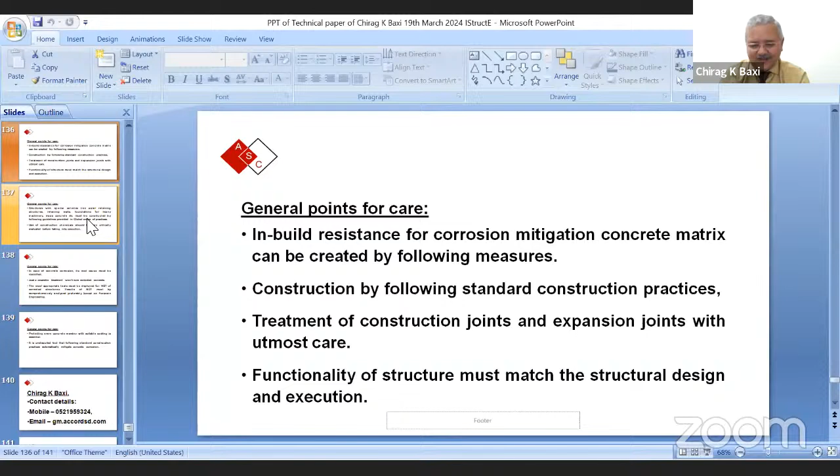For water retaining structures, we must provide water stoppers at regular intervals. Functionality of the structure must be maintained, because if it is a recreation structure, it cannot be converted to any other use; otherwise the loading pattern and other things will also change.

Structures with special services like water retaining structures, with water stoppers, or machinery foundations with mass concrete, must be constructed following guidelines provided by global codes. If it is mass concrete, we have to compensate for heat of hydration.

If it is a machinery foundation, we have to consider the stiffness and damping of the foundation, so that the dampening effect takes care of vibrations. All these things have to be taken care of, otherwise the concrete will deteriorate.

Construction chemicals have to be used very carefully, because most of the time there might be some adverse or side effects of those chemicals. All effects must be seen very carefully before selecting a construction chemical for a particular functionality.

The root cause of concrete corrosion must be identified. Just a cosmetic treatment won't work. If there was a crack, just putting some cement paste and sealing the crack will not work. The most appropriate NDT test must be carried out.

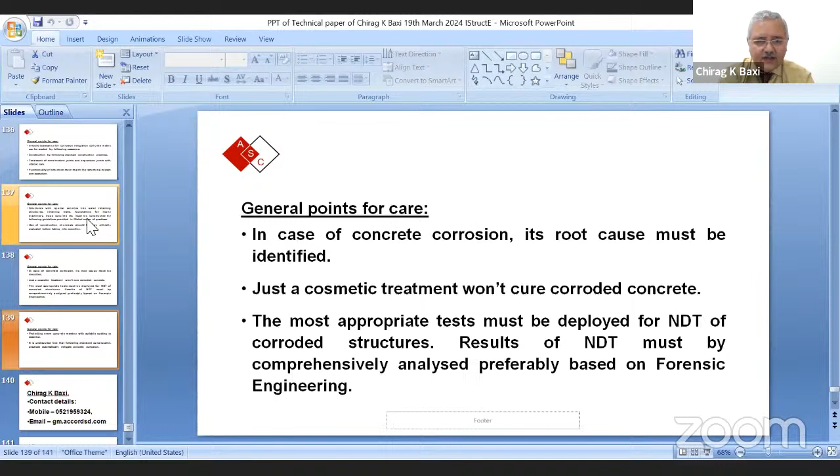Protecting every concrete member with suitable coating is most important. It is an undisputed fact that following standard construction practices automatically mitigates concrete corrosion.

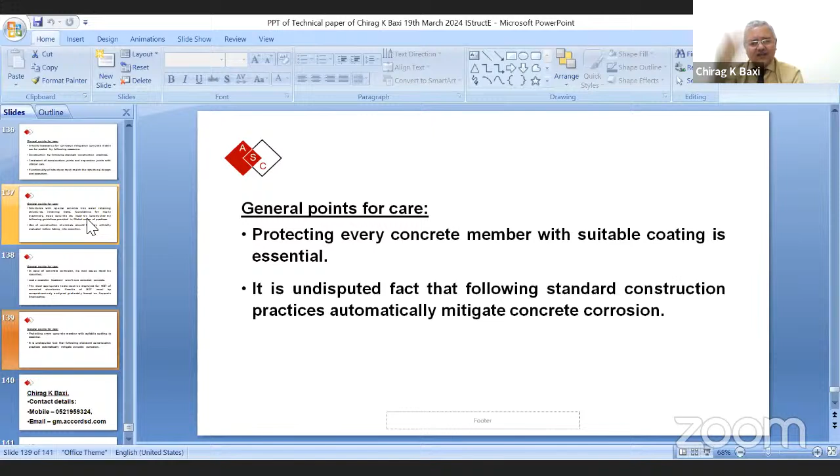We have to follow the standard practices. We cannot deviate from those practices. We cannot say 'that is my experience, nothing will happen' and go for complacency. It will not work here.

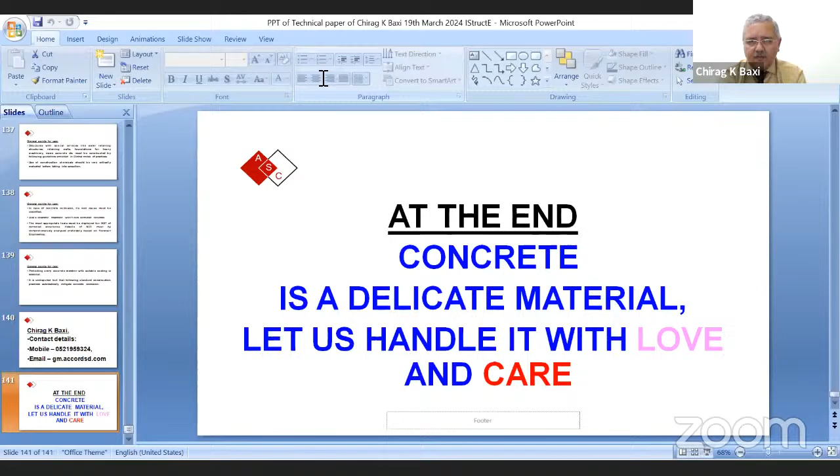Welcome. Thank you very much, Engineer Chirag. That was really a very interesting talk with lots of examples and a deep dive into testing and so on. If you can stop sharing your screen, Chirag, we can spend 5 more minutes if you like. I can share the photos and you can add your comments, since those were missed. I'll try to show my screen.

This was, I think, the example that you wanted to explore. This was the first picture which I wanted to show, that this was the explosion. When the explosion took place, on the very next day, this was the condition of that particular structure.

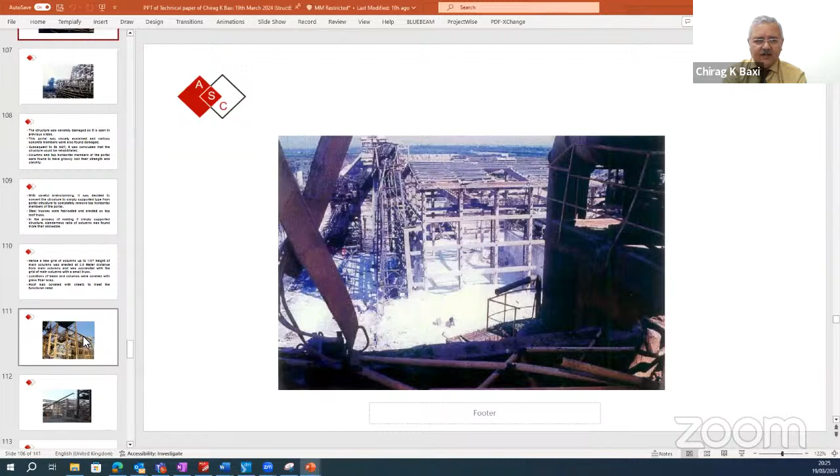And the other photos, do you want to revisit any examples? Yes, these were the pictures during structural rehabilitation. Can you go up? Can you go slightly up?

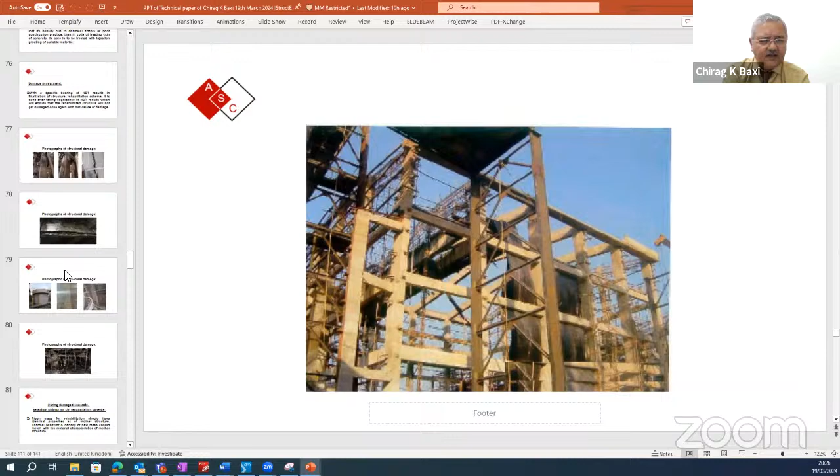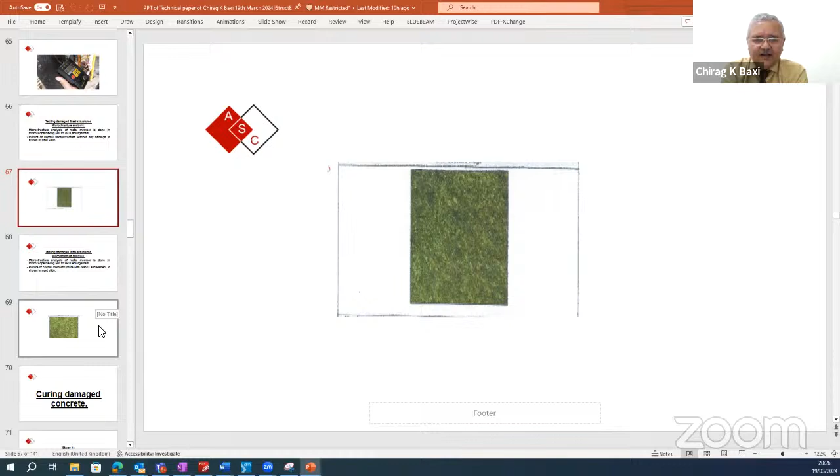But the next one, can you please go to the next one? This is having crevices. You can see these white things are crevices, and these are contaminants that were flushed out. In an 8 mm thick MS plate, can you imagine that corrosion created crevices, and corrosion created a way for these contaminants to enter that metal section?

This is a metal section, not a concrete section. Metal sections are highly impervious as compared to concrete sections, but still it happened. So this is what I wanted to show.

I tell you one thing: it is now possible to find out what's happening to a metal section. Even metal can be subjected to NDTs, and we can find out what's happening inside the concrete or steel mass to design the rehabilitation scheme. That's what I wanted to tell you.